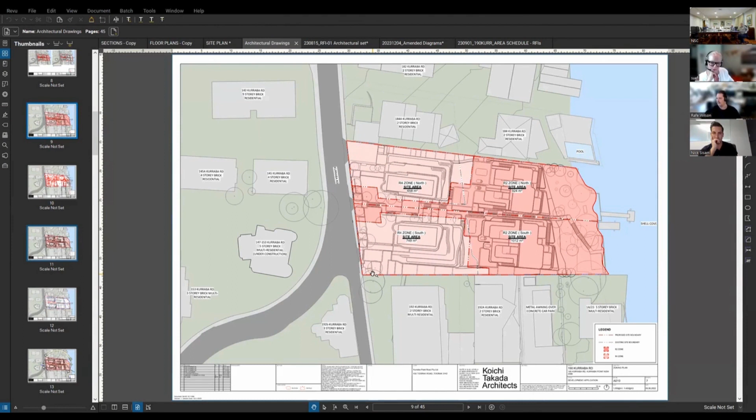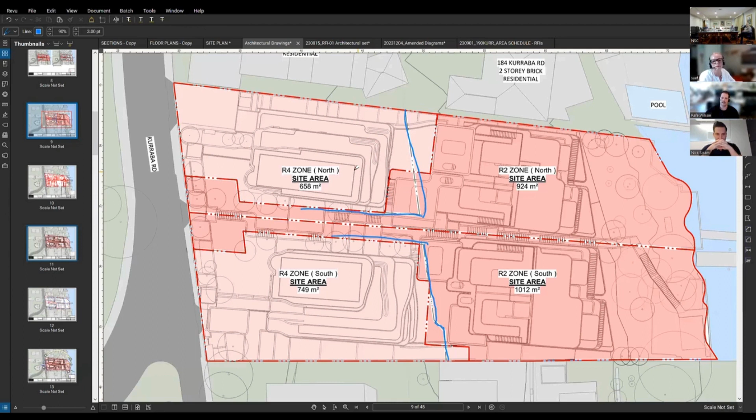Yeah, okay, great. So to talk to the first point, about the location of the buildings on the site and as they relate to the zoning - as Sue said, we've been very careful to contain particularly the RFBs at the top of the site and the R4 zones to within the R4s. This diagram outlines the existing site boundary, highlighted in blue, which is the current zone boundary. You can see the R4 buildings are completely within that divide between the R4 and the R2, so there is no leak or blur from that higher massing allowance into the lower massing allowance. We're really careful about that.

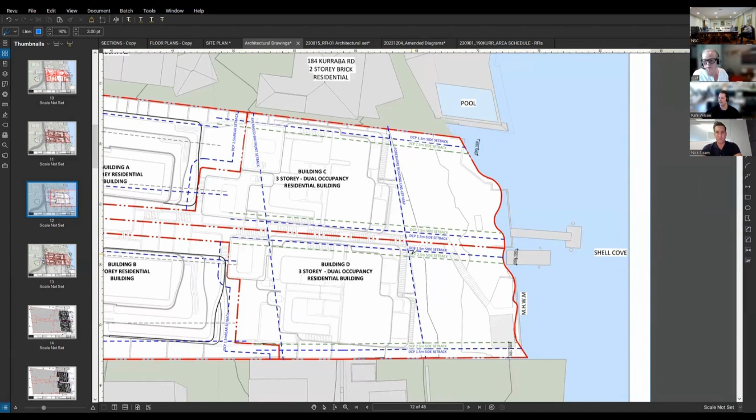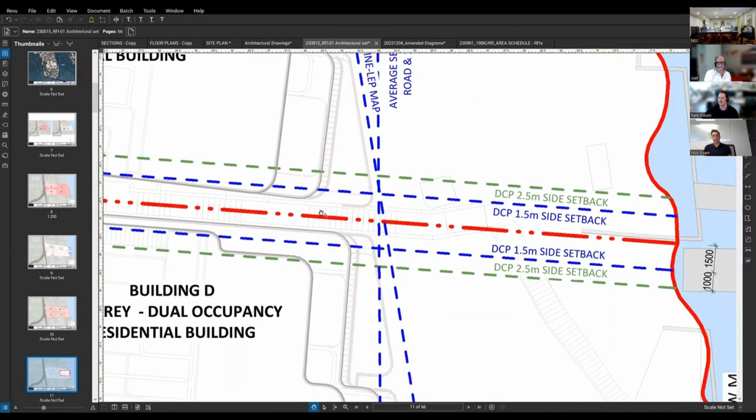I'll touch quickly on another point that was raised, the foreshore setback line. This was brought up in the report, noting that some of our building was within that foreshore setback line. Excuse me, I just need to jump between sheets quickly. There we go - so again, I'm highlighting the foreshore setback line here, and you can see that the building is completely contained behind that line. That includes the terraces, the enclosed area which is the GFA, and even the substantial landscape. There is a minor bit of landscape work in that area, really about making good the existing stairs which allow access from the centre of the site down to the foreshore area. So there's no substantial work proposed within that area. Actually, as part of the submission, we significantly pulled back from the foreshore to try to better align with the neighbouring setbacks.

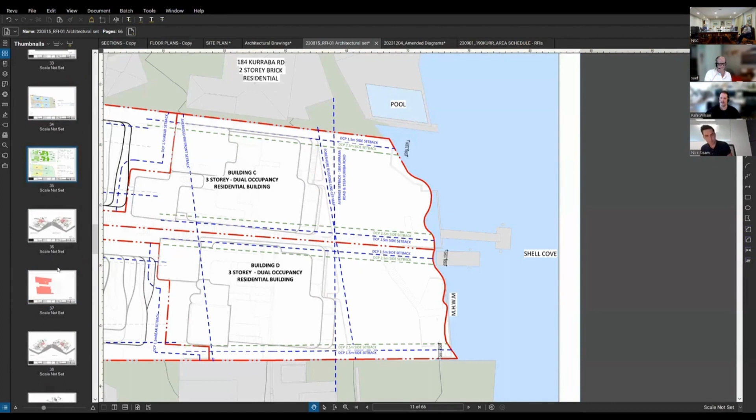Another point I might touch on quickly is the method for calculating area for site calculations. From the presentations today and the report we received, there was discussion about how we address the items in the RFI. I just want to note that for the purposes of calculations, the easement in the northwest corner of the site has been excluded from the total site area, which speaks to the point about access handles and easements.

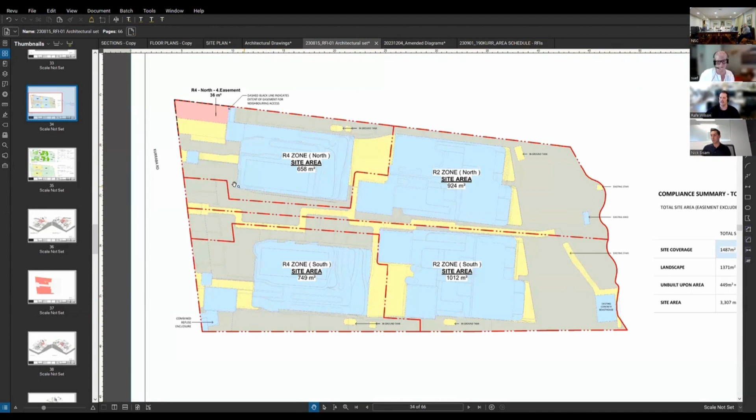We've gone through very carefully and methodically addressing the points in the RFI, making sure we've attributed certain parts of the site to the areas required. So the site cover, for example, includes bin areas on ground and covered walkways. We've been careful to remove the in-ground tanks from landscape area calculations. What we've come up with is a calculation we feel is completely compliant with the points set out in the RFI and in the DCP.

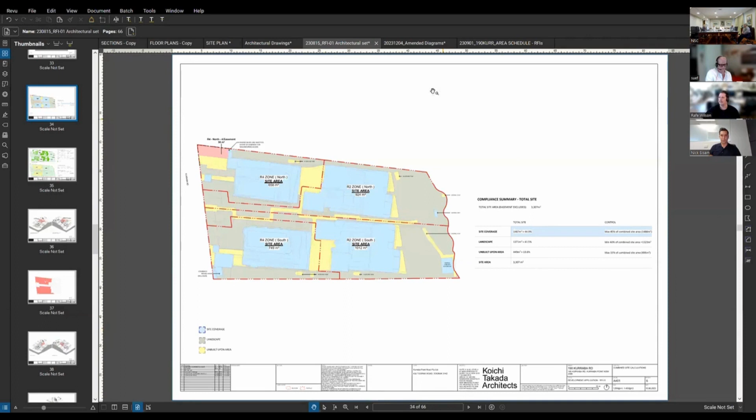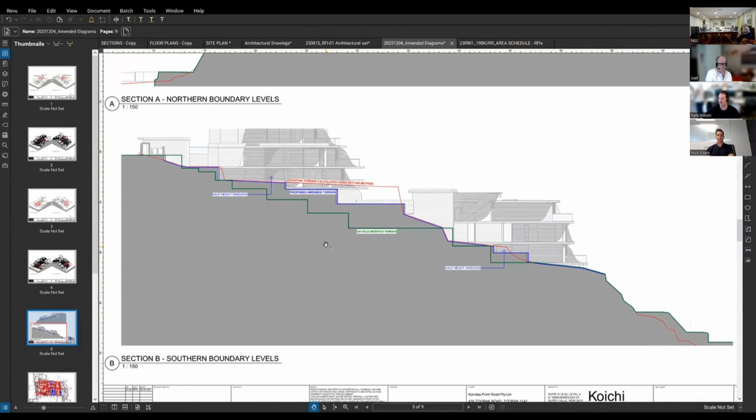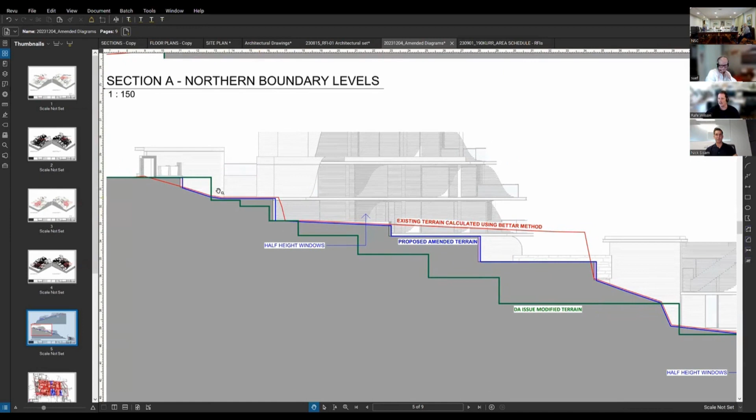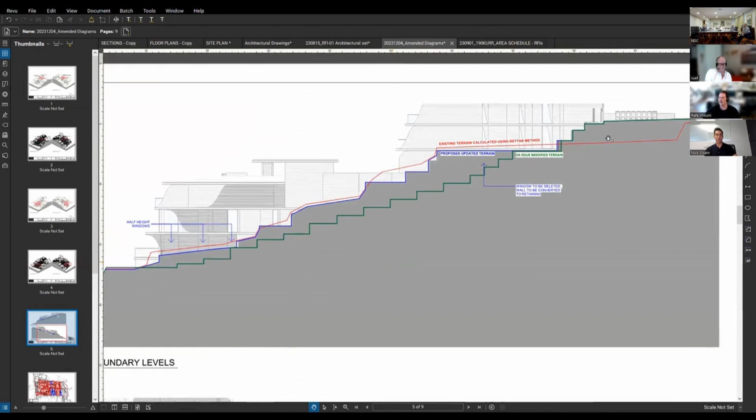I could talk quickly to some of the diagrams we resubmitted. One of the key points was to do with excavation. I wanted to point this diagram out to the panel because it's useful in showing where we are compared to the original submission. This green line represents the excavation put forward with the original DA submission. Taking on board the comments from council in the RFI, we've gone back and modified that excavation significantly, including deleting an entire basement level. That blue line represents the new proposed excavation—that's just one slice through the site, but it's representative of the strategy throughout.

And again, on the opposite elevation, you can see there's been a really concerted effort to eliminate a huge amount of that excavated area.

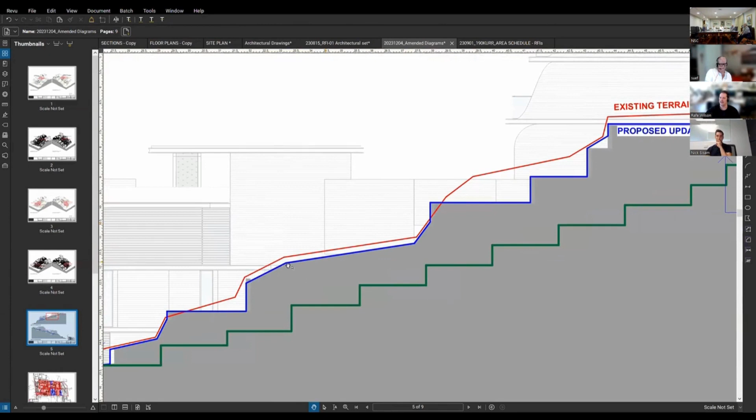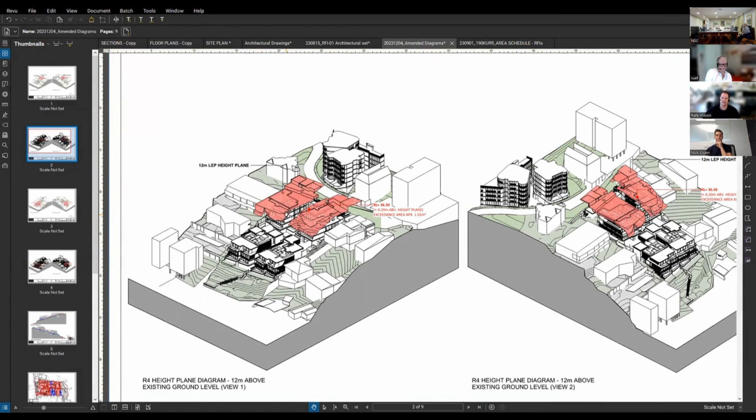I might bring everyone's attention to the height plane diagrams, which I believe are resubmitted with Guide's letter. The original submission was assessed under Merman, so we used the building pads that we had on site. We prepared detailed documentation to show how we would recalculate those height planes using the Bettar method, including a drawing showing the exact points we took on site and how we extrapolated the information from the surveyed information.

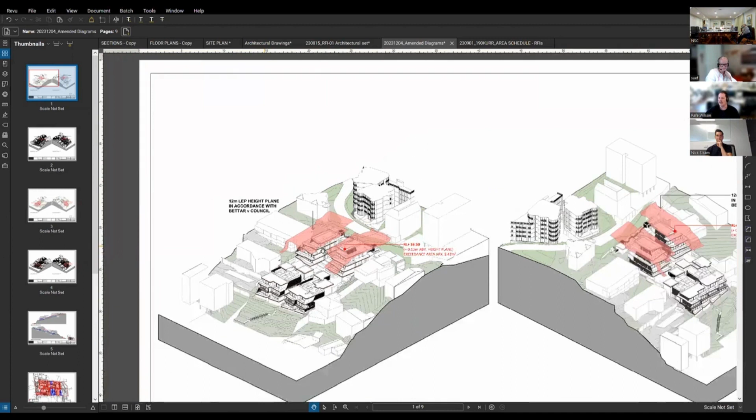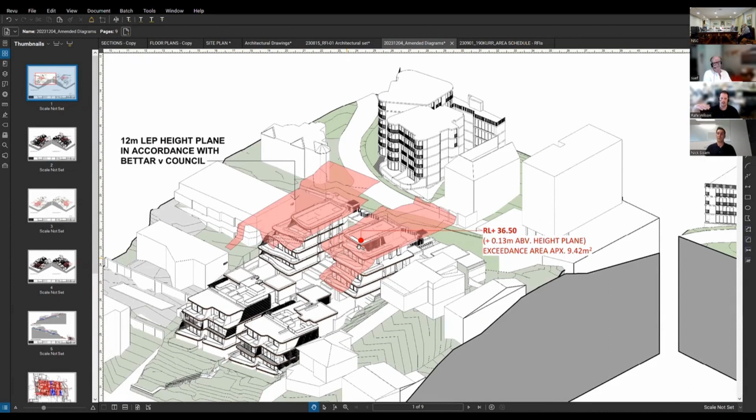What these diagrams actually show us is that there isn't a huge amount of variation. In fact, the Bettar method was slightly worse for us because we lose out on those building pads, which are actually above the existing or natural ground because they sit proud of the site. So that's the R4 zone with Bettar and Merman, and the same for the R2—here we're looking at Bettar, the extrapolated, and then Merman.

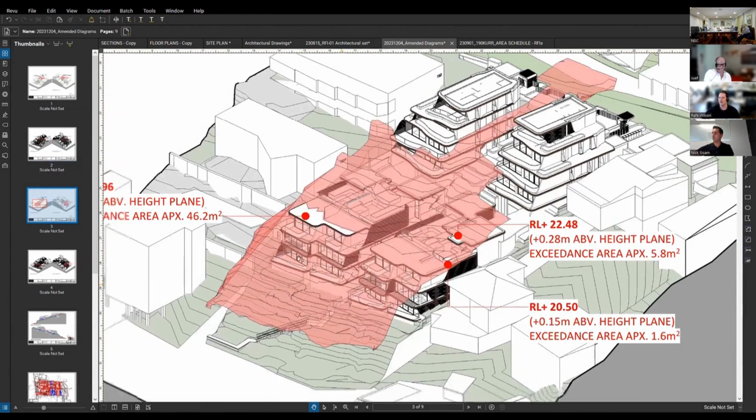So I think those are probably the critical things we wanted to talk through in terms of architectural diagrams, but very happy to answer any questions. Great, thank you very well.

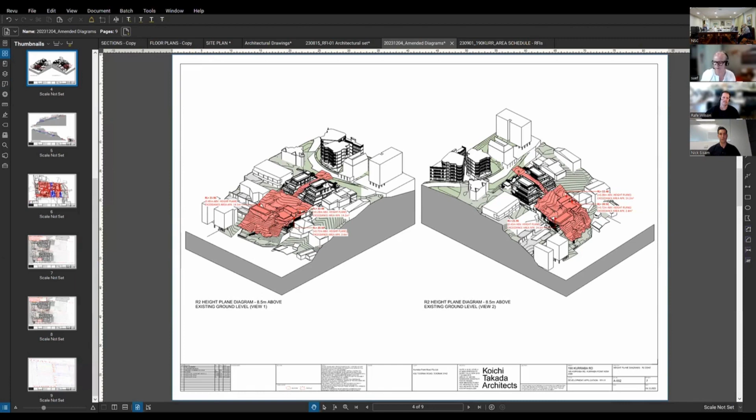Can I invite the panel to ask any questions they may have? Now, first of all, I haven't really heard your response to the recommendation in the council officer's report and their reasons there. So could I just understand what your response to the council officer's concerns is?

They were mostly raised in our response to you, in relation to height and setbacks. Sorry, I'm going to try to now turn to your reasons for refusal. So they're mostly covered by the response to you. Okay, let me just turn—hold on, I'm just turning to the reasons for refusal in my report. Bear with me.

I would disagree that it doesn't satisfy the objectives of the zone. There are two zones, and this is a development which eminently tries to do exactly that, satisfy the objectives of the zone. Whilst there are some minor non-compliances in terms of some elements of the DCP, it's a function of the complexity of the site in terms of its own structure and also its topographic structure. But in all of those respects, views are minimally affected, if at all, and the breaches are minimal, if at all. Contextually, I think it sits very well within the site.

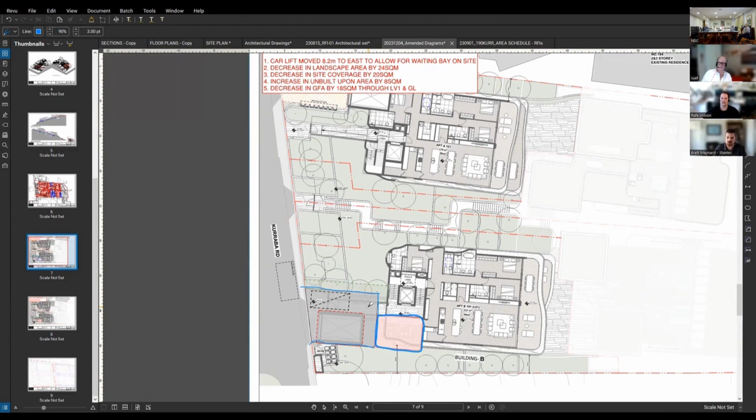We've made the point in the letter you received earlier this week that what we're talking about is 3 to 4 vehicle movements in a peak hour. So the likelihood that anyone needs to use the waiting bay is extremely low. You can imagine the impact of a vehicle there for up to 2 minutes once an hour, which may never occur, given that's a maximum of 1 vehicle every 15 minutes. You'd be pretty unlucky to have 2 vehicles trying to pass here.

So part of this is really about whether it's necessary to have that arrangement. It's also a question of whether it's necessary to have a waiting bay, because you can actually use sensors where priority is always given to vehicles entering the site, not necessarily exiting. That's already proposed. If there's a vehicle approaching, there can obviously be some sort of remote call system put in place these days so that entering vehicles are always given that permission.

I guess the waiting bay is a notional thing. We're not talking about line marking that on the ground. Per council's report, council's traffic engineer doesn't believe there's any need to modify the existing no stopping zone. It would simply be a location a vehicle may need to wait in the unlikely event a vehicle was already coming out of the car lift - that would be the scenario where the car lift is already in use for a vehicle exiting, because otherwise it's prioritising the entering vehicles.

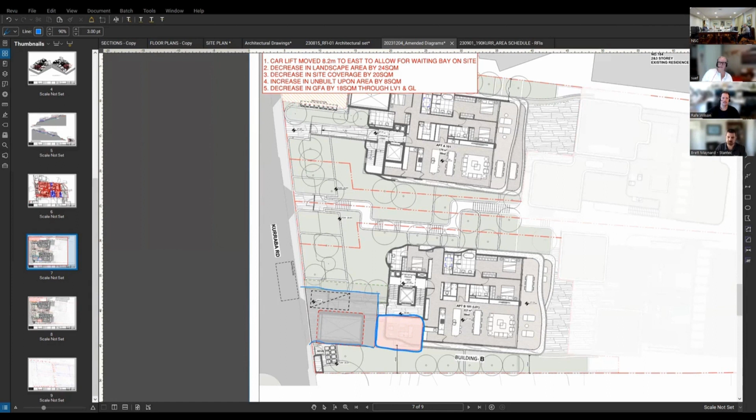Can I ask a question of my own expert? Rafe, how many levels, if you were to put the car lift in the building, would need to be removed? Well, it's effectively the whole building, because you need to look at overrun on the level above, this level at ground, and the level below. So it's 2 or 3 levels. Sorry, what do you mean by levels - isn't it just loss of floor space over multiple levels? Yeah, but it's not loss of levels, it's loss of floor space. Yes, sorry, yeah.

I think the concern architecturally is really about that frontage. We've already had to accommodate the easement to the north, and we were doing everything we possibly could to minimize the impact of this development on the streetscape character by trying to keep that frontage to a minimum, and give the building a good address from a pedestrian standpoint.

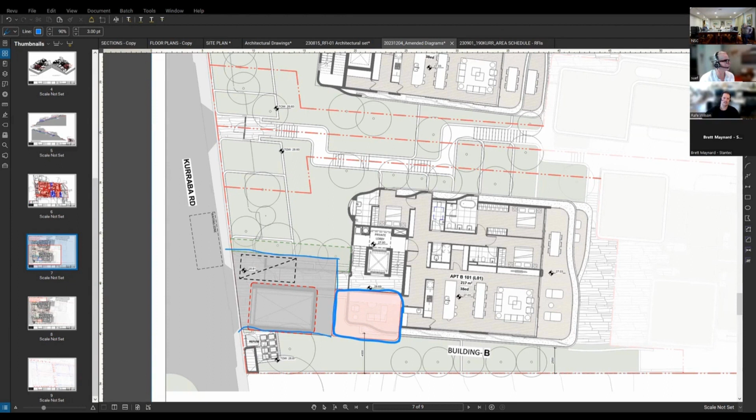Can I understand, moving on to another question - can I understand the rationale behind why you've calculated site coverage and landscaping holistically, but then at the same time you've made this application on the basis that they're 4 individual buildings on 4 individual sites? What's the rationale that you've taken that view?

Well, perhaps I'll answer this question. We would have loved to have integrated the flat buildings underground, but if you think about it we can't, because it's R2 zoned. So we had to keep them as 2 separate buildings, and then the rest were dual occupancies - they needed to be dual occupancies, and we wanted to get access to the water. So it wasn't so much that we chose to have 4 built forms, it's just that the permissibilities forced us into 2 built forms in terms of the residential flat building. We couldn't go over the R2 land because it's prohibited, so we had to keep them as 2 separate buildings.

So therefore, why would you not be applying the landscape and site coverages to each of those individual lots? Because the whole development is integrated as one. When you walk into that site, you don't think you're walking into one flat building or another flat building. It is one development, it is integrated. The permissibility alignments, where the lines are, is a furphy to the development of this site - it's something we have to deal with, but it shouldn't constrain the built form development.

So then why wouldn't ADG apply if you're going to say to me it's one building? ADG does apply. Sorry, ADG doesn't apply because of the size of the development. It has separate permissibilities as a matter of fact and law - it has to be an RFB and an RFB in the R4, and dual occupancies on the lower level R2. ADG doesn't apply to the dual occupancies, and it doesn't apply to the flat buildings because of their size. They're not integrated in terms of a basement, but they're integrated as a form of development.